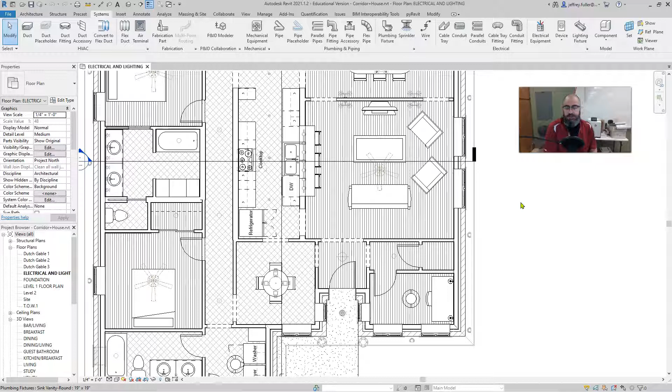What I'm going to go over with you in this video is placing your receptacles. That's the final thing, and it's really not that hard. It's pretty simple. There are a couple of things you have to keep in mind, but what we're going to do is place receptacles. Now I'm going to use this room right here to start with as an example. This is a living room.

There are actually some rules that we go by, and it's real easy to stay within those rules. I don't have the code manual to show it to you right now because they post it a little differently than they used to, and I have to get access to the electrical code. So without access to that, I can tell you what I remember. When you're placing the receptacles, a rule of thumb, and this is not part of code, is just make sure you provide plenty of

access to electrical outlets for people to plug in things they're going to have in each individual room. You've got to think about what people are going to use in these certain rooms. A living room a lot of times is going to be an entertainment center. It could have a lot of different electrical components: TVs, not really VCRs, but DVD players, DVRs, video game consoles, things like that. So you need to provide enough for that.

You also have to think in terms of how they are going to clean this house. They might have a vacuum cleaner or a buffer or something like that, and they're going to have to plug in at various different locations. So the rule of thumb to take care of all that is to make sure you have at least one receptacle on every wall.

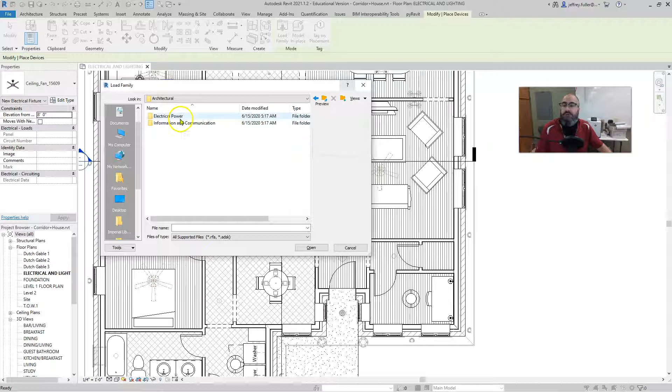So let's look in Revit and see where we actually get these devices. We go into the electrical device, which is under the Systems tab, and we're going to go to electrical fixture. The way I do this is I usually load them all into my plan to begin with. Have I loaded those already? I don't think so. So we're going to load family and then go down to electrical, architectural, electrical power, terminals. Okay, it's going to be under terminals.

We don't want to use the floor. That's typically used in commercial applications, and it's really not a popular thing to do anymore because you've got the receptacles right on the floor and people spill water in them. That's not good. Typically what you're going to use is this duplex outlet, which is just your standard outlet. If you look on your wall in your bedroom and it's got two places you can plug in an electrical cord, that's what a duplex is.

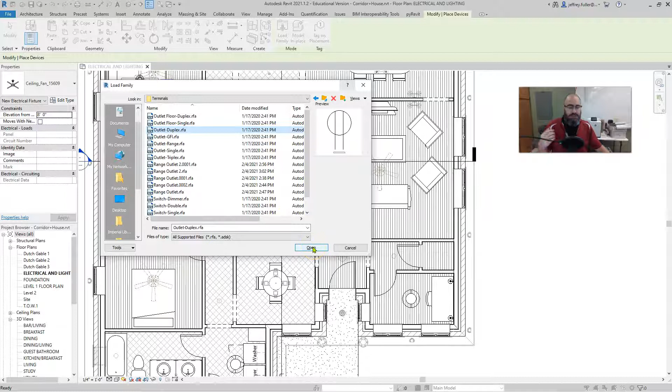Let's say you have one of those plates on the wall that has maybe 2 or 3 sets of those duplex receptacles in it. We're just going to place 2 or 3 of these symbols side by side to represent all of those. And when they finish out the electrical in the house, they'll actually put a single plate that will cover all 3 of those receptacles. So we're just going to use the duplex outlet for our standard everyday outlets around the room.

Okay, so this is a rule regarding building code: when you place receptacles, they have to be within 6 feet of any obstruction and no more than 12 feet apart. So what is an obstruction? An obstruction is a corner or a doorway or anything like that. As you can see, the code is pretty broad, so it's almost impossible not to meet code. If I put a receptacle right here, that's clearly within 6 feet of this door and 6 feet of this corner.

So I'll place one right here in the center of that wall. And of course, it doesn't look like they're going to use a whole lot of electricity back here other than possibly a vacuum cleaner or something like that.

This wall is a little longer, and of course, there's a possibility of maybe using a little bit more on these walls. So I'm going to place one between these two windows, and then one right here, close to this corner. And that's for these two chairs in case they want to put a lamp or something, a reading lamp by those two chairs, or maybe whoever sits there wants to plug up a cell phone all the time.

Here is the entertainment center. So we're going to place a few back here for the entertainment center. And that will allow them to plug all of their entertainment components in.

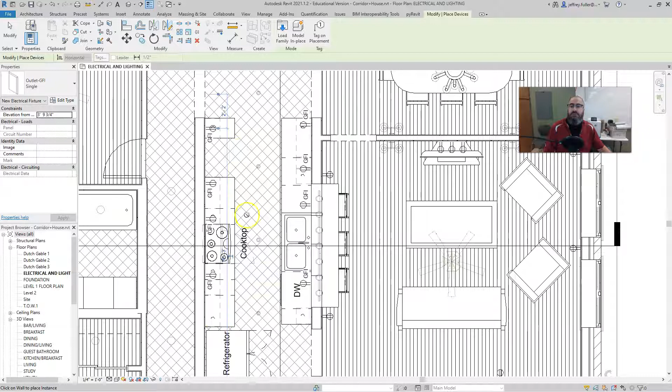No, actually, the refrigerator is over here. I'm not sure what goes in that spot. But anyway, we've got a receptacle there for whatever it needs to be. And then one right here.

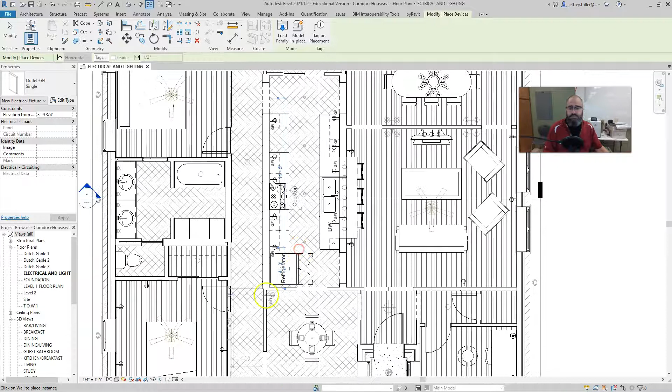So that is, and again, looking at money and budget, these receptacles cost money, but they're not very expensive, and you can just about afford to put these anywhere. Bathrooms, the same thing. Bathrooms will have receptacles. Now you've got two sinks right over here, so it's probably best to put one by each sink, so someone can shave and someone else can use their blow dryer.

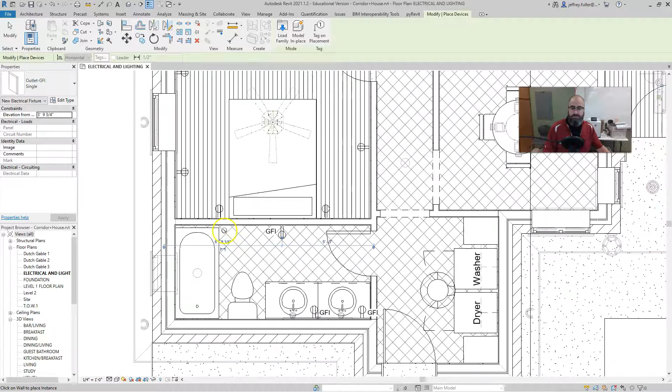Don't put one by the tub. Okay, don't even do that. We're just going to put one right over here on the other side of the wall in case you want to plug in a heater of some sort. But do not put one over here close to the tub. There's too much water over there jumping around. Over here, same thing. Put one by each sink.

In this bathroom, nothing near the tub. Okay, keep it away from the tub. We'll probably put one over here on this little wall. Looks like there's a row of cabinets right there. And then that will allow anyone to plug something else in, a floor buffer or a vacuum cleaner. So that pretty much takes care of all of it.

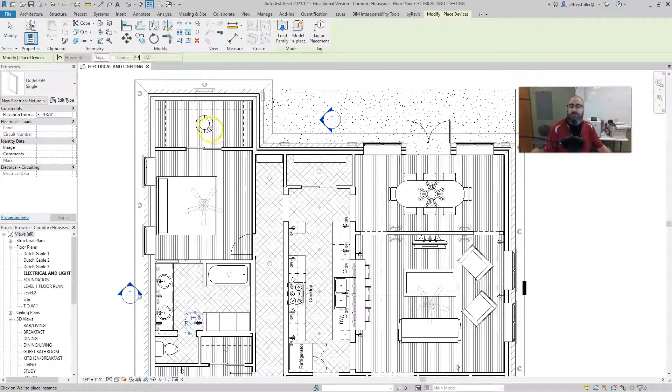Now, sometimes too, where is our master? I think this is our master closet. You can also put one or two in a master closet. So maybe they want to stand inside the master closet and iron their clothes. And it doesn't have to be a GFI like I just placed there. It could just be a regular receptacle.

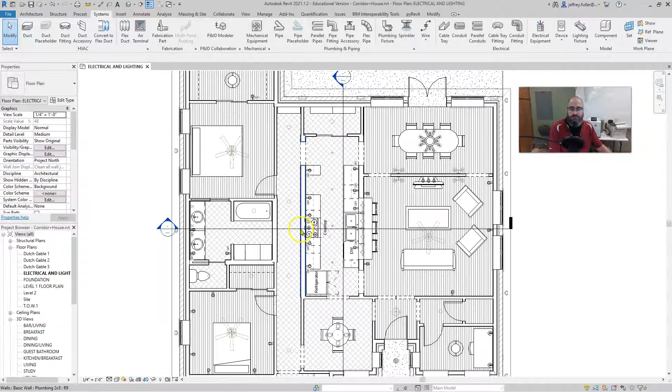Hallways, put a couple in the hallways, depending on how long the hallway is. This is a relatively long hallway. However, it is pretty good use of space. It gives access to every area without a whole lot of wasted space. It looks like here we've got some kind of bookshelf at the end of it. It is a shelving unit. So in this particular hallway, I would put one here, definitely put one here, and then probably another one down here somewhere.

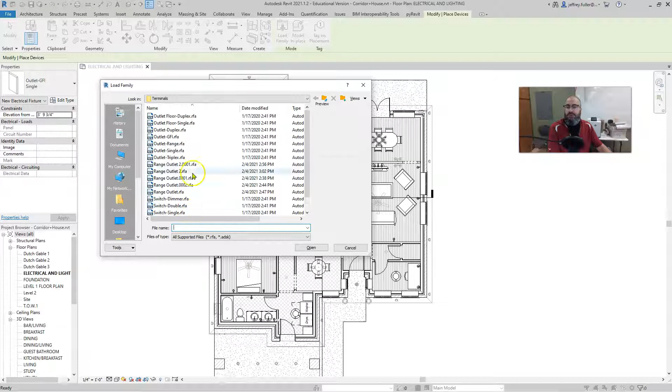All right. Now, there's also outside, you want to put some weatherproof devices outside as well. And I think we have some weatherproof. Switch, dimmer, single, 3-way. Okay, no weatherproof, so don't even worry about that. Don't worry about weatherproof, but do put a range outlet. And there's a range outlet. It looks like there's a couple of different ones here.

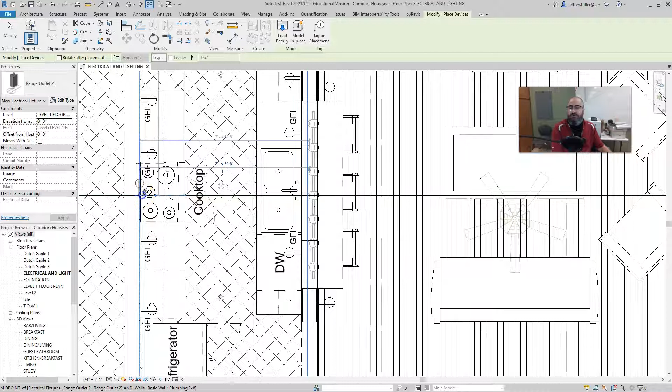Let's do this one. And the range outlet is just going to go back here behind the range. That one does not place correctly, but I think that was one I was editing earlier. But anyway, just place a range receptacle right here behind the range. That way the range can be plugged in. And that's really all you have to do.

So make sure you use your whole house. Don't just use a couple of rooms. Go ahead and do the entire house, placing receptacles. Don't junk it up, okay? Just think about where you're putting them and if it's actually going to be useful in that location. Don't try to put a whole bunch out there just to make sure that you get it all done, because if you overdo it, I'm not going to like that, and I'm probably going to take some points off for it being overdone.

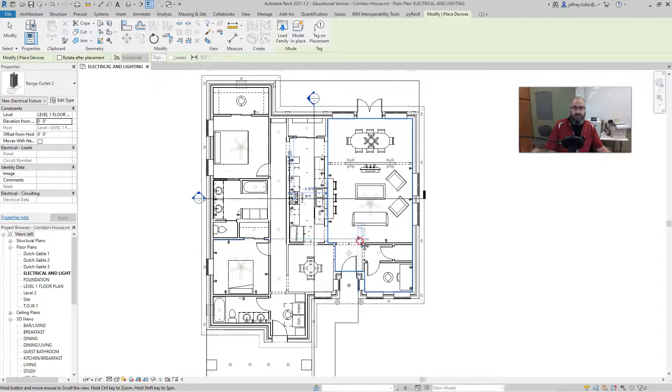But do that, and don't worry about the weatherproof ones outside. We'll work with that some other time if we need to. But you guys get the drift, and I just want you to go through and practice this. Some of you already have practiced doing this. Some of you have not, okay? So if you have had practice doing it, it should be pretty easy for you. But that is all I've got.

Now, once you finish all this, just make sure you do your lighting, your light fixtures, run all your wire. Of course, you've got to put your switches in first, but your light fixtures, your switches, run your wires, okay, and then put your receptacles. No wires go to the receptacles. Just place them on the drawing just like that. That is it. Once you get this turned in, this will be the end of this particular assignment.

And then we're going to have a real short test at the end, just asking you a few questions about what we did during this whole lighting thing. So hopefully you've paid attention and you can recall some of the information that we have talked about. If not, just make sure that you watch the videos again so that you can get some of the nuances that I talk about, in addition to just learning how to place the receptacles in certain places.